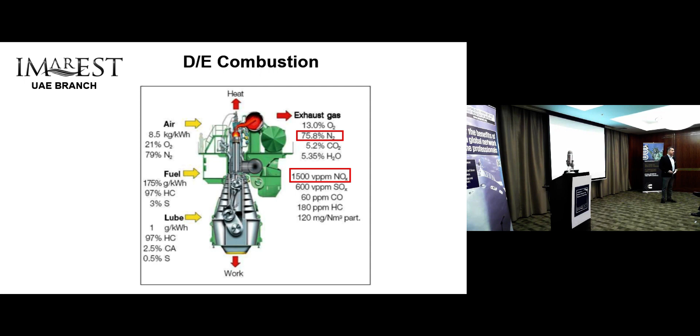In the production of exhaust gases, there's nitrogen, which forms the majority of the exhaust gases, up to 76%, as you can see. And likewise, the volume ppm is also the maximum amongst all the constituents of exhaust gas. Now, when we look at exhaust gas by itself, nitrogen is not a problem because natural air consists mostly of nitrogen, so by itself it's okay.

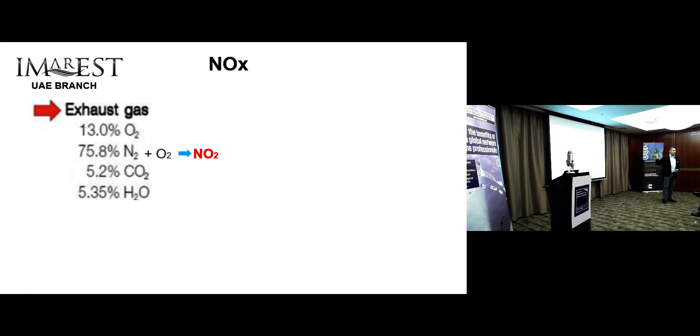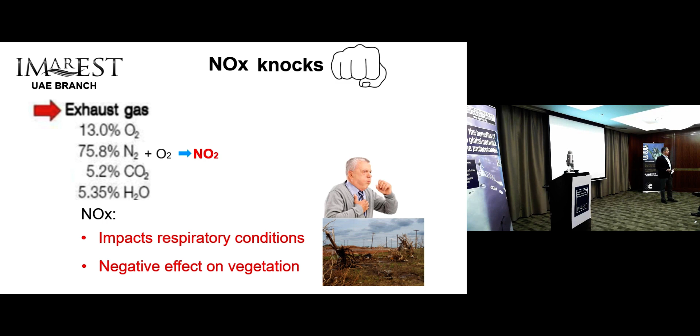However, when it combines with oxygen, it produces nitrogen oxides, or NOx, which really leads to respiratory problems for human beings, as well as affecting our vegetation. So this certainly has some effect on both humans as well as the crops that we grow.

Accordingly, shipping, the IMO and MARPOL in particular, has taken action in terms of having limits on NOx emissions from engines and designating certain geographical areas as NOx emission control areas.

Of course, these limits are in tiers. There are three IMO tiers, and the tiers are dependent on when the ship is built. Tier 1 is for ships built on or after 1st of Jan 2000. Tier 2 is after 1st of Jan 2011. And there's a Tier 3 also, which applies to ships built on or after 1 Jan 2016, which are operating in the emission control areas.

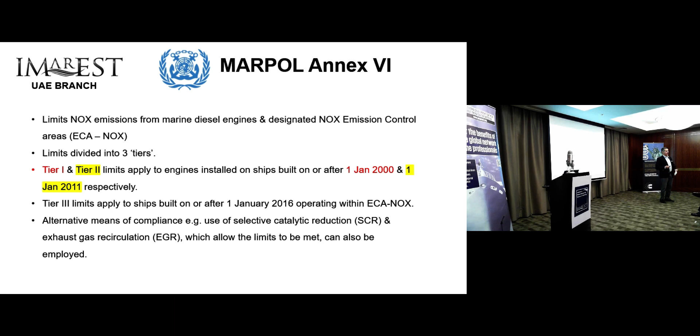Of course, an engine can be inherently very NOx efficient, but there are alternative means in which you can achieve these limits, and you can either have a selective catalytic reduction system or an exhaust gas recirculation system, which more or less achieves the same objective. So there is a bit of flexibility, believe it or not, that the IMO shows.

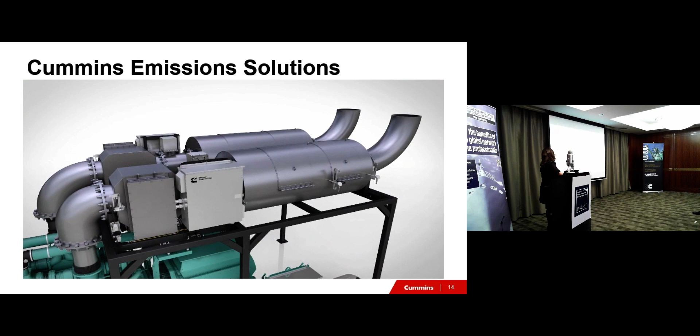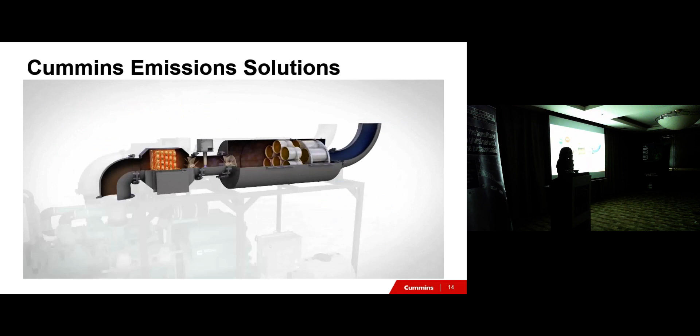Cummins engineers have developed modular after-treatment systems that simultaneously curb emissions such as nitrogen oxides, carbon monoxide, unburned hydrocarbons, and particulate matter, and convert the emissions to environmentally friendly byproducts.

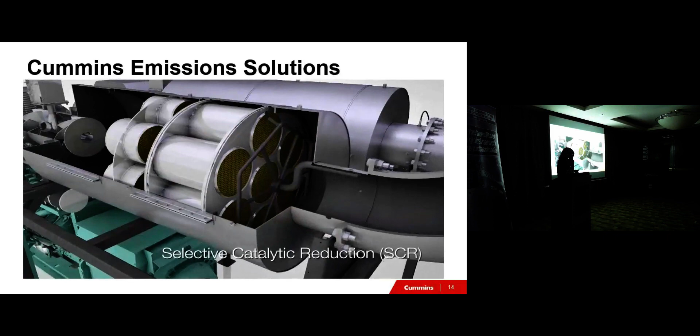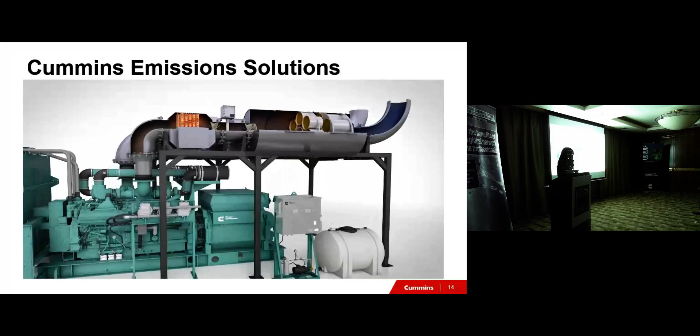A Tier 4 system combines a proven generator set with a Cummins exhaust after-treatment system that incorporates selective catalytic reduction technology. Depending on engine size and application requirements, this system may be augmented with a rapid response exhaust preheater and a diesel particulate filter. The entire after-treatment process is managed by a standalone control system which fully integrates with Cummins generator set controls. Here's how it works.

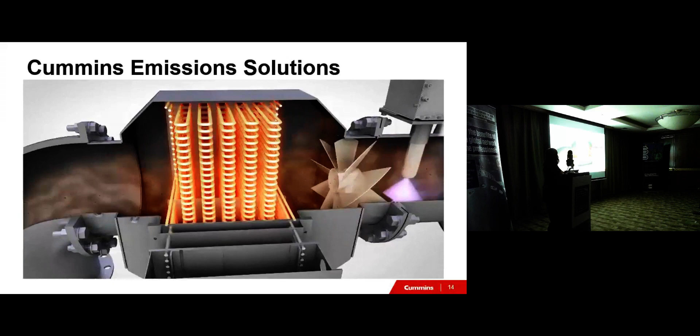In systems equipped with a preheater, exhaust gas is rapidly heated to 450 degrees Fahrenheit, beginning the NOx conversion process in as little as 9 minutes.

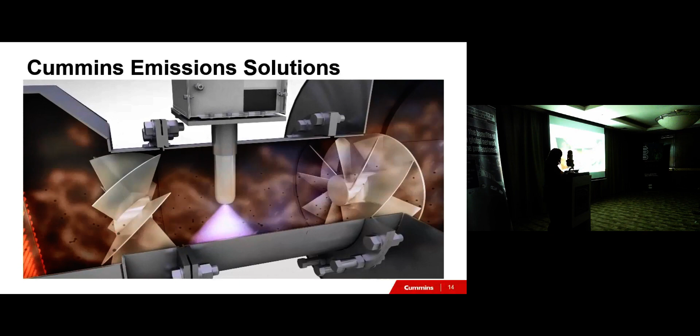A patent-pending self-cleaning injector system introduces commercially available ammonia-based diesel exhaust fluid into the exhaust stream. The DEF injection rate is determined by a closed-loop, real-time monitoring and control system, which measures NOx upstream and downstream of the SCR catalyst. Injection is accomplished without compressed air.

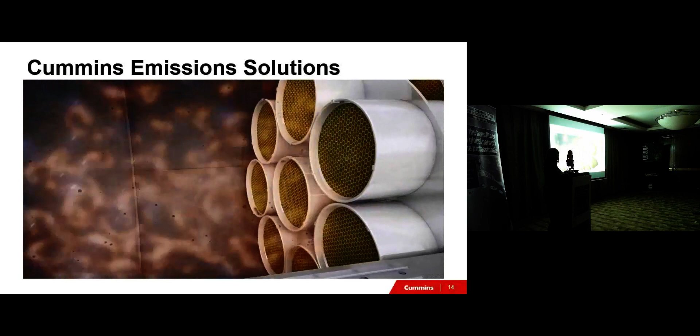When a diesel particulate filter is incorporated, the DEF exhaust stream mixture passes through the self-cleaning DPF, where particulate matter is reduced to required standards, providing 3,500 hours of runtime before maintenance is required. The DPF is regenerated by the exhaust heater, which oxidizes the captured particulate matter.

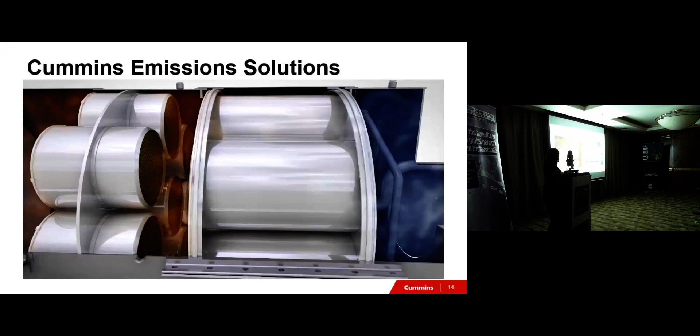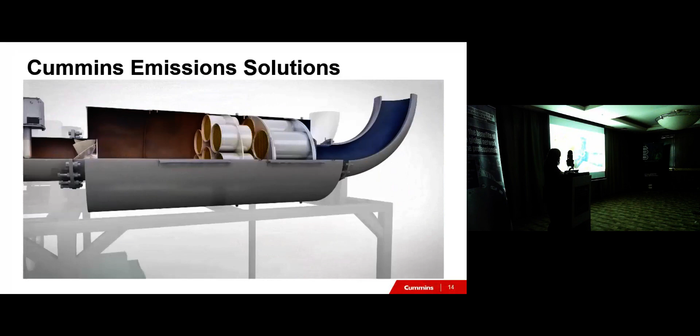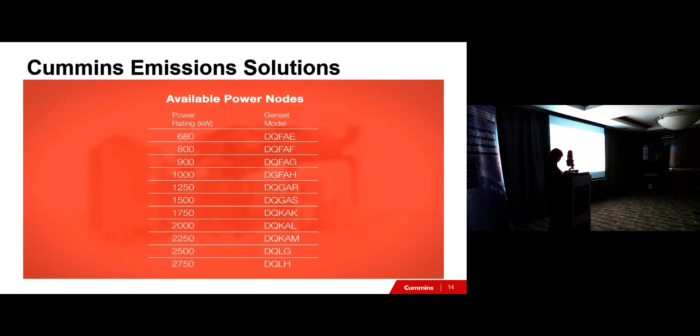The DEF exhaust stream mixture then passes over a vanadium-based catalyst, converting the residual pollutants into water, nitrogen, and carbon dioxide. If you're looking for emissions after-treatment systems for diesel generator sets, only Cummins has a comprehensive line of high-horsepower Tier 4 interim certified systems, available in power nodes from 680 to 2,750 kilowatts.

Cummins generator sets are already certified as meeting EPA Tier 4 interim requirements and are even Tier 4 final ready, giving owners and specifiers total operational flexibility.

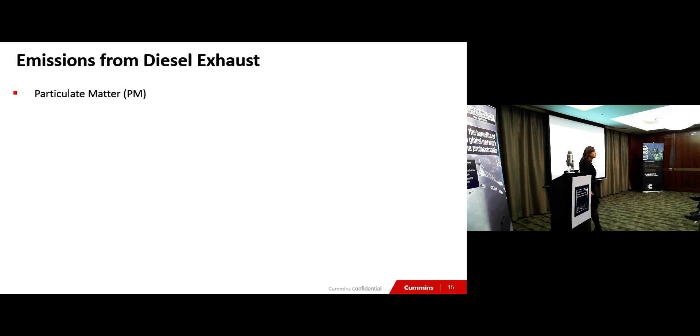Of course, this is the emission we get from the diesel exhaust: particulate matter, NOx, sulfur, hydrocarbons, and carbon monoxide.

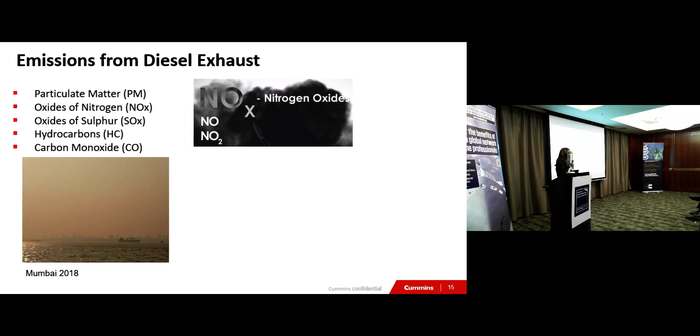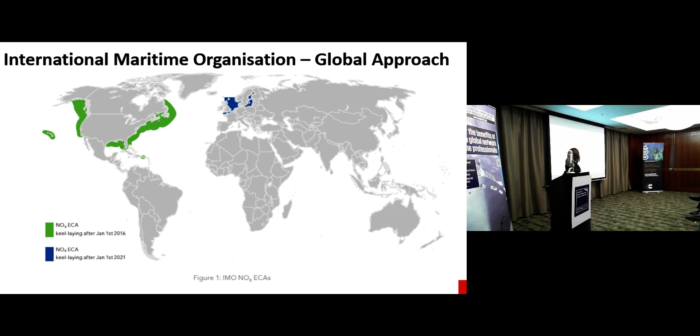The IMO, the global approach, is telling you that for any keel laying vessels from 2016 in the NOx emission control areas, which is the Caribbeans, should be complying to the IMO Tier III. While the global approach for the future ones, for any vessels operating in these areas, the Baltic Sea and the North Sea, after any vessel which is keel laying after 2021 should be complying to the same approach.

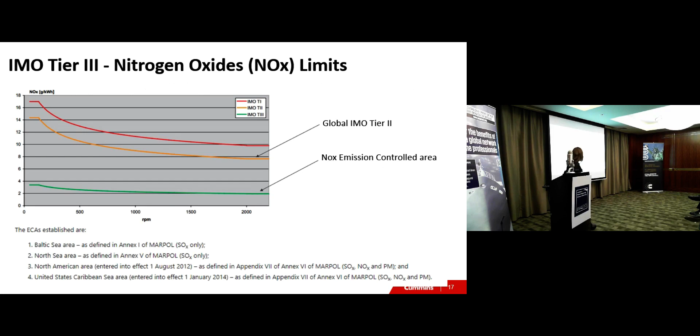You can see the graphs, how it's evolving. But of course, this is only for the NOx emission control areas only. Because earlier, most of the global approach was concentrating on the SOx, the sulfur oxides. But now we are more into the NOx.

Here there is the regulations. It says that the IMO Tier III levels effective from 2016 for any vessel that's keel laying from 2016 in these particular areas should be complying to the IMO Tier III.

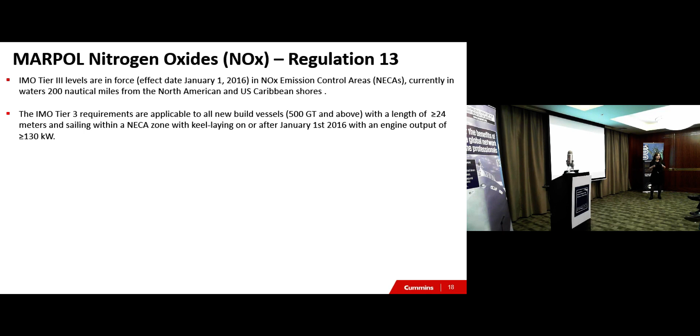But there are some conditions I have to take into consideration because this is not applicable for any vessel. It's only applicable for the Class C vessels: the vessels which is above 500 GT, which the length is more than 24 meters, which is sailing in this particular zones, and the keel laying after 2016. So these are the conditions for applying or for complying to Tier III.

And there's another interesting thing. If I'm having a vessel that's already operating and I'm going to do a retrofit project for it, for any engine that's above 130 kilowatts, I should do the same. This engine has to be compliant to IMO Tier III. And it's the same approach for the first conditions we have said: the engine has to be above 130 kilowatts.

So the global approach for the future, that in the Baltic Sea and the North Sea, this will be an emission control area. For any vessel that is built after 2021, it should be complying to the NOx regulation.

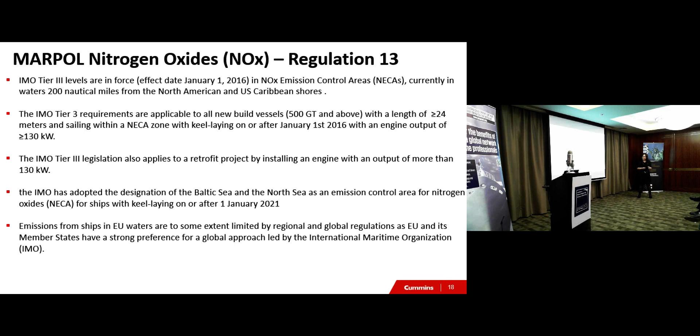So the emissions for the European Union, they have a different approach. They have accepted it as an idea, and they are going to comply with it, but there isn't anything written or official that they are going to comply to IMO Tier III. But they are accepting it as a concept.

We are expecting that in future everyone will try to cope with these new regulations and try to get their engine treated to be compliant with IMO Tier III.

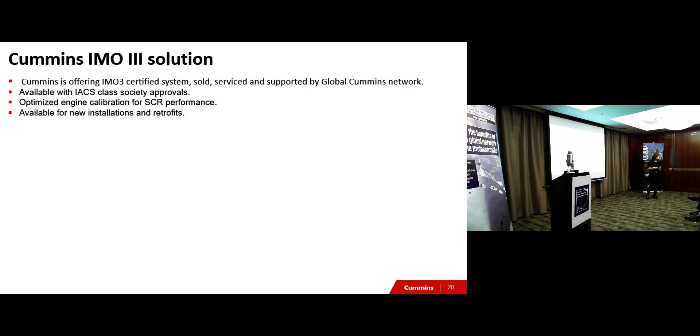All Cummins engine calibration, SCR performance, of course. And there is new installation, and if you have a retrofit project, of course we can align with that as well. We have only one after-treatment per engine - even if you have two mufflers for the engine output, you can only collapse it into one after-treatment.

Of course, you have various voltages available for this engine, and of course it's going as per Cummins standard fuel and lube oil specifications. Its replacement is designed to match the engine lifetime for the overhaul. So nothing will affect the engine itself - it's only the after-treatment for the exhaust. And there's of course the maintenance interval for the engine, whether it is complying to the exhaust regulation or not.

Cummins always supports that in the aftermarket. There are no new diagnostic tools, nothing new - it's just that you are complying with it while being given solutions for the exhaust.

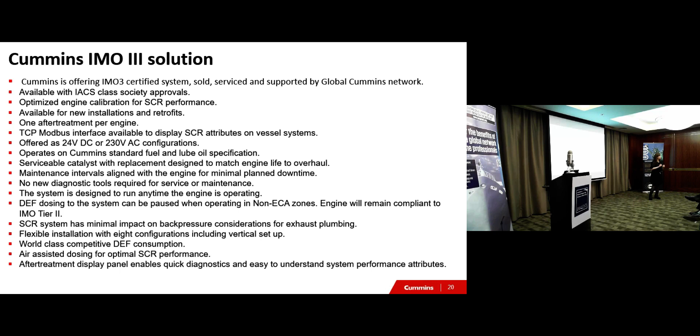The after-treatment display panel enables you quick diagnosis to easily understand the system performance. And of course, the panel - you have a separate control panel - it's very important to measure all the NOx quantities before and after the treatment to make sure you are complying with the global approach.

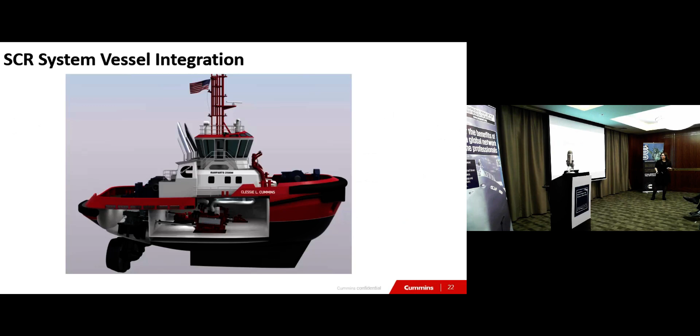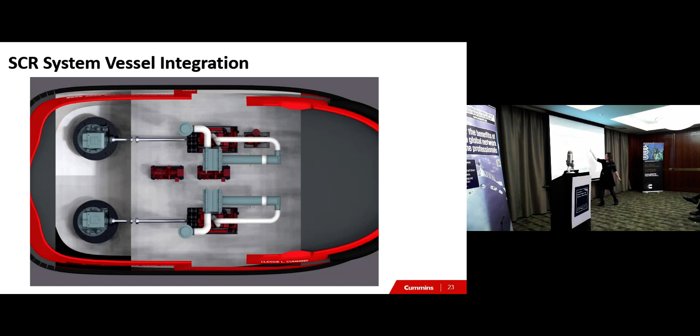Okay, question one. When you say that all you have to do to change over to tier 2 from tier 3 is very simple, you say that means you're indicating that you stop injecting urea. Is that what it is?

I'm not sure, disabling all the system, the urea, the sensors. But it will be compliant to tier 2, yeah. No, like say for example, you come out of the NICA zone and then you're outside NICA. So all I have to do is what? Just switch off. Which is the item that I switch off?

The control module in the after treatment system. It is monitoring the sensors and the injector of the urea. So the entire system will be disabled. Okay, and except the particulate filter.

Yes, the particulate filter, of course, it's in line, isn't it? Yes, it is in line. So that you can't bypass it, so that you're not bypassing. So the particulate matter is being filtered all through. It will be like any component in the exhaust system.

The entire system back pressure will not be impacted, or the back pressure will not be increased? No, not the back pressure. What I'm saying is, okay, let me rephrase it.

See, now the entire system is on, the SCR is on. So all this is doing basically is the exhaust gas is coming in, then the urea is being injected, then there's a chemical reaction, everything is being changed to nitrogen and water, and then it's being exhausted. But while being exhausted, it's being filtered.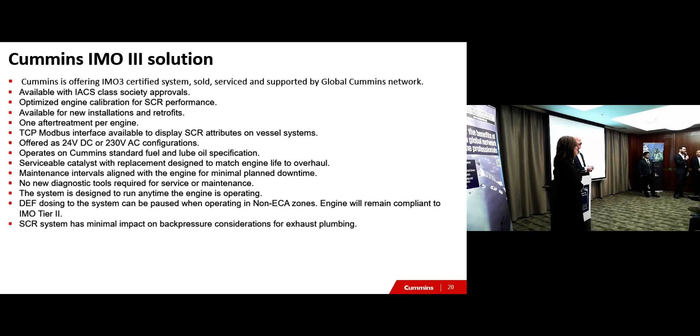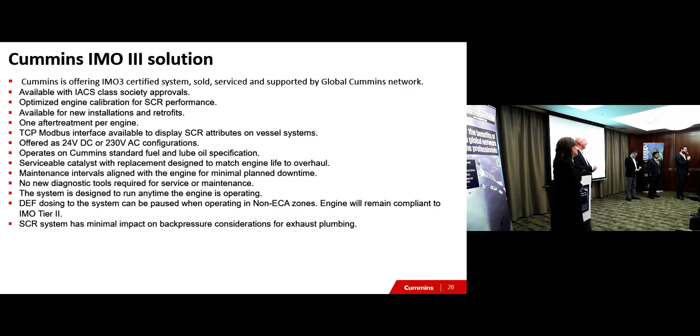Basically, this SCR is reducing your PM content, am I right? Particulates, yeah, it's reducing the content. If you don't have the SCR, then it's around 2 grams per kilowatt hour, that's what you said, right? 2 to 4, yeah, that's Tier 3. So that would increase.

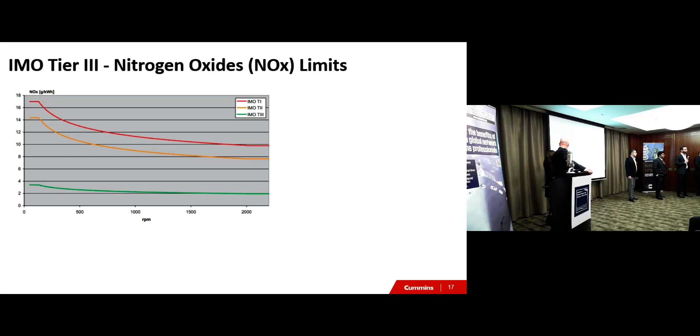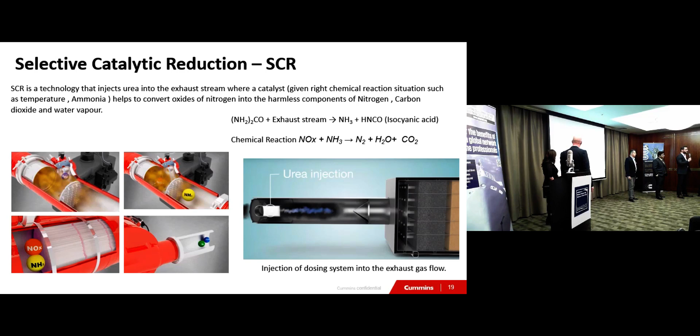Then your PM filter, is that going to change? It's for comparative operation—I don't have the answer right now, but we can check. Basically I want to know if the PM filter fitted is catering to both Tier 2 and Tier 3, for example. In Tier 3 zone we have 2 grams per kilowatt hour, but in Tier 2 you can go up to 15, 16, 12, 10, 9. So what happens to the filter then? At that point, maybe it tends to get choked much faster.

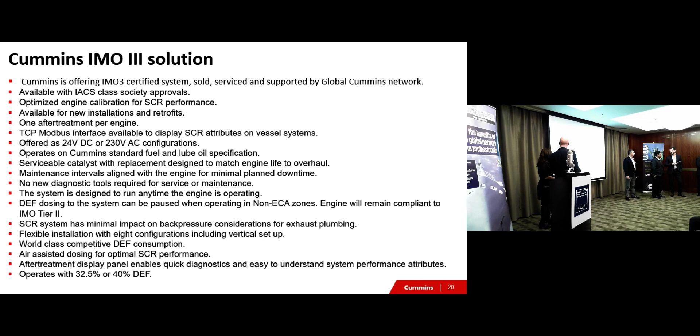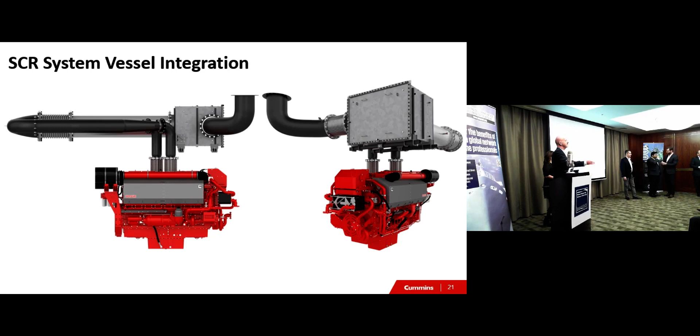As I told you, this modification doesn't apply only for comparative purposes. I'm not talking about NOx, I'm talking about PM. But the SCR value is what you are saying. Yeah, but is the PM size dropping or no? The PM content is dropping to 2 grams per kilowatt hour. That's not— could we have a slide with the reactions, please? Yeah, okay.

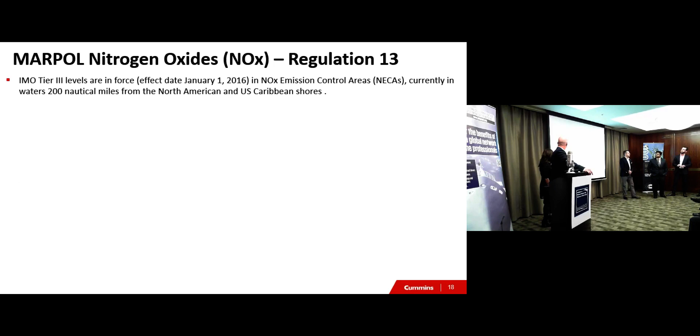That is your main problem. See, that's exactly the point. Okay, anyway, I get that. I think we need to understand the filtering process there, and the size of the filter, how it's going to change. Because the bottom line is, suppose I don't have an SCR, I just want to fit a PM filter. Can I do it?

Though you're not involved in this, the latest is, somebody, Mr. Zimmermann, came back and said sulfuric acid is not the killer, PM is the killer, right? But the scrubbers are not fitted with PM filters. Only sulfuric acid is being taken, sulfur is being taken off, because that is what the regulation requires. So the killing continues. This is, scrubber is useless. It's completely useless, scrubber, as of now, open type or closed type. Don't say that, I'm selling those things, you know.

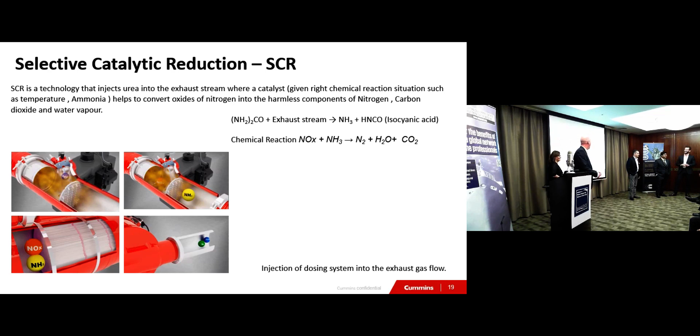Can I ask one question? The DEF liquid that you're selling, that's only going to be sold by, that's a Cummins product? No, we are not selling it. Oh, you're not selling it, so that means that's third party. That's still a good business.

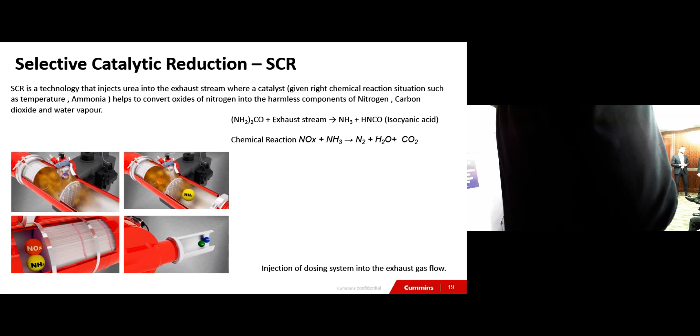And these units can be installed on any brand of engine, basically. Yes, so it will be on a project basis, since you have the space. We have the space. Talib.

Hello, okay. I think this is all very good in the industrial and power generation sector. In the marine sector it is a little different. Basically, the bulk carriers and others who are 2011 built, or which are Tier 1 classified, they are going in for retrofit, but they can't do it because the cost of the retrofit is the same as the cost of a new engine, since all components get changed. It is just not that simple. So what I'm trying to say is, for the existing fleet, retrofitting to Tier 3 is not possible. I'm putting it right.

Now what we can do is, these engines can be retrofit only for tugboats and other small engines, in the range of 450 kilowatt, where there's scope for a small modification, a pipeline fabrication, and do it. But on the main bulk carriers, main tankers, it can't be done. I've done all the study. The cost is almost like a full new engine, except the block and the crankshaft can only be saved, nothing else. Okay?

So this is a bit of a study, as you rightly said. Everybody is working on this process of how it can be done. Like the scrubber is a temporary solution now, we all know about it, correct?

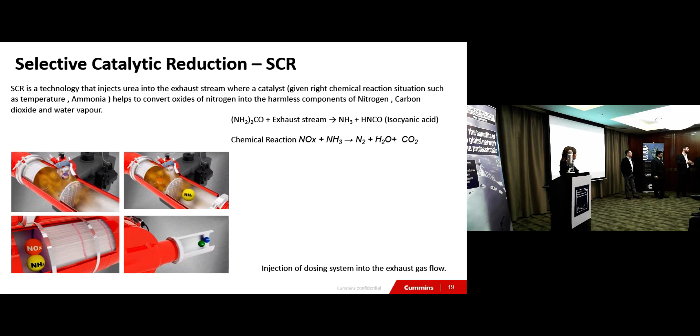I think there are special cases where you can get a privilege from class societies not to go for the new challenge, which is the IMO Tier III. But I think if there's someone from class, he can mention that process. I don't recall all of them, but there are some special cases where you don't need to comply with IMO Tier III, kind of, if you don't have enough space in your ship, we can retrofit it. So there are acceptable cases, and I think class societies have listed those cases. Exemptions they'll be giving. Yeah, there are exemptions.

But this is only if the flag approves it, basically it's going to the flag now. We have some people, Mustafa, we have some people from class over here, maybe they're best suited to answer. What would you say? Is there anybody volunteering? No, it's the flag, not the class. And we work... Same thing. No, class is also working on this.

But replying to you sir, actually this is not applicable except for some kind of vessels, not any of the vessels. So the small ones are not applicable for this. And the fact is, it's not 500, it's 400, and the length as well, the length of the vessel. The length is okay, but it's 400, not 500. 500 is gross tonnage. And for the engine itself, if you have a small engine, it's not applicable. That's what I said, less than 400 is only like small tugboats and crew boats and all that, they took that into consideration. Most of the marine business is over the 500, 400, you know.

It's talking about trade ships, ocean going ships. They don't have big engines - well, there are high-speed small engines, because your case is only for tugboats, power generation and small engines. This is their range - Cummins range is up to 4,200 horsepower. So it's not small business, but you don't go for bulk carriers from Cummins - that's not their range. We cover OCVs, offshore vessels, shore vessels, and fishing trawlers.

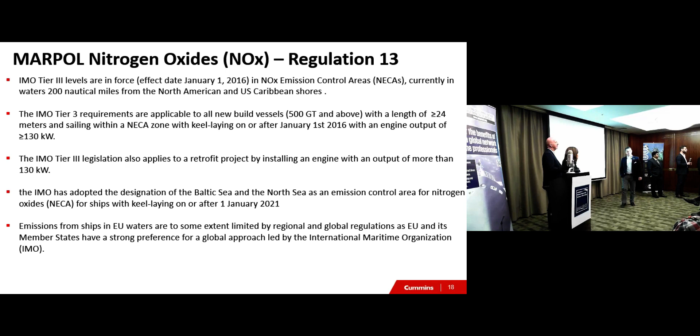I think this gentleman has something to share with us. We are discussing the regional restrictions - sorry, because I'm not coming from the marine industry myself, so I'm trying to get insights from my neighbors here. We're discussing the regional restrictions. Why in some areas, like Northern America or Northern Europe, there are tight restrictions and not in the rest of the world? Is it the policies of the countries, or are there other reasons?

I think everybody is going to sign this anyhow at the end. So IMO Tier II applies globally today, and IMO Tier III is going to be the same. There are some regional regulations, like in China, in India, some parts of the globe - some countries have their own regulations on emissions, but anyhow, they need to comply with IMO, which is global.

And I'm sorry, if I can ask a follow-up question - the feeling I'm getting is that this technology you're presenting today is still in some sort of early stages, because everybody, not just yourself, everyone in the world is struggling to comply with these regulations, correct? So who's implying these regulations? Is it some government entities, or is it the IMO?